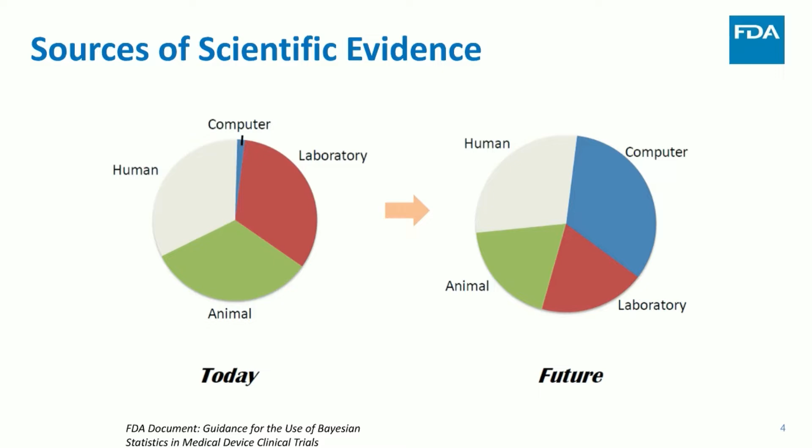To start off, this figure represents what we view as our current sources of evidence for decision making today, which comes from humans, laboratory, and animal models. But as we move into the future, we see a greater role for in silico sources of evidence. This slide is really put together for clinical trials, but this is impacting across the different disciplines across the FDA.

Recognizing that, FDA has formed a modeling and simulation working group a couple of years ago, and the FDA encounters many different kinds of models that impact its decision making. The working group is organized based on the type of modeling.

So there's chemical, there's mechanistic, statistical, physics-based—there's a wide range. The working group's objective is really to raise awareness about modeling and simulation and how it's used to advance public health and foster enhanced communication among the different stakeholders. The working group has about over 200 members in the FDA.

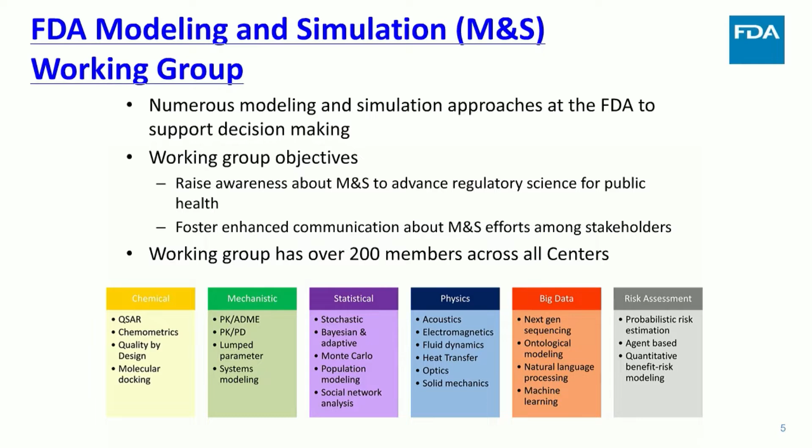But today, what I'm really going to talk about is pharmaceutical quality specifically. In the quality by design framework, models can be used at every stage of development and manufacturing. We have examples of predictive models that have appeared in regulatory submissions and that have been used to control product quality.

Such as dissolution models for release, multivariate statistical models used for estimating residual solvent in a drying and API process, and of course chemometric models associated with PAT methods that can be used for real-time release. We've seen models in all these different buckets, from product and process design, risk assessment, design space identification, in-process controls, real-time release, and so forth.

Just a quick note on terminology and where we are, and I think when we talk about the evolution that's happening currently, these terms are coming into play.

So most of our models in product quality, when we're talking control strategy, are empirical. They're models derived from data and experiments, where we're recognizing relationships based on the experiments you're running.

A lot of the models, maybe in process design or product design, have more mechanistic elements, more first principles, where you're understanding the relationships between variables and that's how you're deriving the models. But we see elements of these coming together.

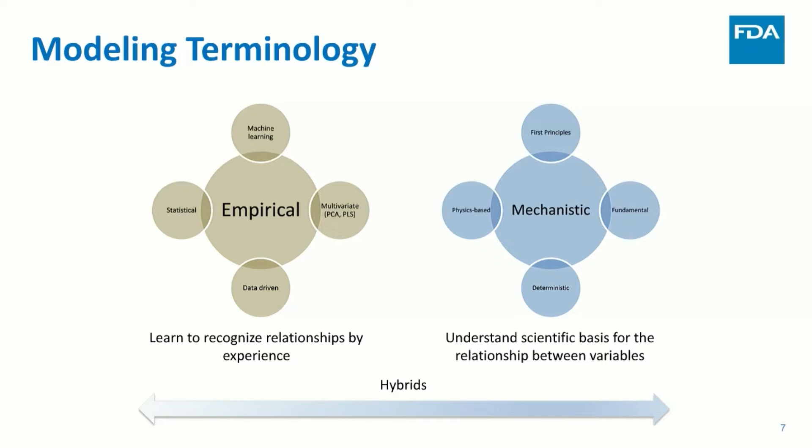There's many benefits and challenges when implementing models, and this is really our internal perspective. As a regulatory agency, we also see models as a potential benefit for process evaluation and quality assessment. So can we use models in how we do our work, not only sponsors. It's very helpful to establish input and output relationships. I think they can be used throughout the product life cycle, such as risk assessment for change prior to implementation.

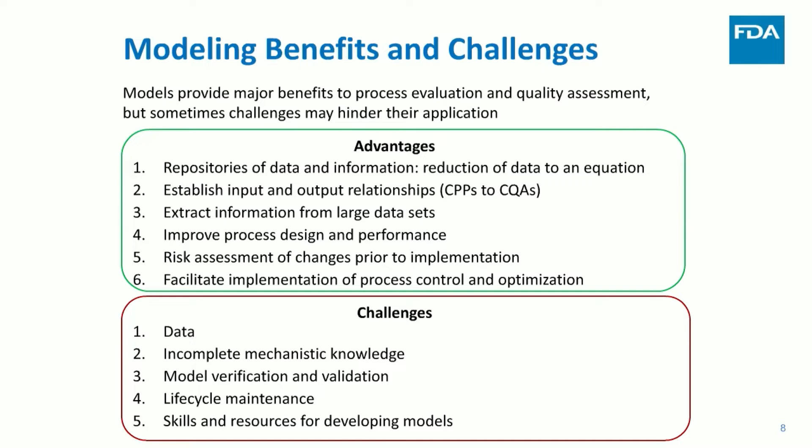But there are a lot of challenges, and one challenge for us is access to data that's representative of the products and processes we're trying to model. I think a common challenge that faces both sponsors and agencies is how to establish the credibility of that model. That's where verification and validation come into play. And if you're talking about models that are going to be used as part of a control strategy, lifecycle maintenance enters the equation.

As I mentioned before, development and assessment of process models by OPQ is not unprecedented, but the frequency and type of models and applications are evolving. We're moving from where we would traditionally just see models derived from design of experiments. And when we had PAT, we had some chemometric models. Now we're seeing a much more wide variety of models being implemented as part of the control strategy. There's still a number of applications, but this is growing and evolving.

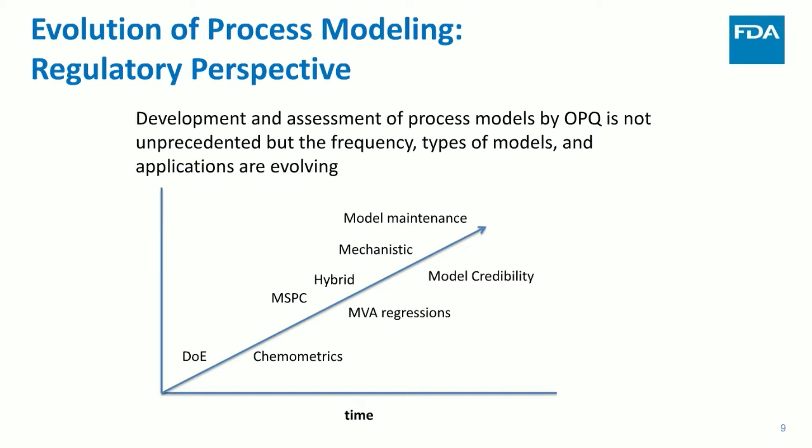We feel this is driven in part by the adoption of advanced manufacturing, such as continuous manufacturing and other advanced manufacturing processes. These processes are generally inherently data-rich. They're connected to plant-wide control systems which are collecting information, because new models are being applied to them. And we see, for all these reasons, it's raising the profile of modeling as part of the toolset to implement these advanced manufacturing systems.

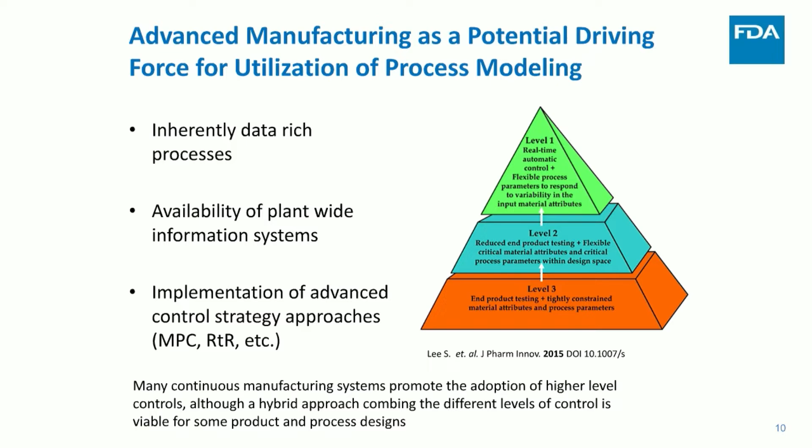If we look at the current regulatory framework, we do have some regulatory documents that talk about models, and one of the primary ones is the ICH Points to Consider document, which categorizes models based on impact to product quality, with high, medium, and low impact. Your high impact models are typically reserved for your sole indicator of product quality, so this would be maybe a real-time release type of model. Your low impact model would be something that falls in the realm of process design, helping you make a decision at that point in the process, far away from actually impacting product release and certifying product quality. It provides a limited amount of information, very general, about how you validate models for these different impact levels, although it does talk a little bit about how you would document them in the regulatory submission.

Now, one type of model we have gained a lot of experience with are models associated with process analytical methods, particularly NIR. In the NIR draft guidance, there's a lot of specific information about how to validate those specific models. We talk a lot about the information we'd like to see on that external validation set, and what information needs to be supplied as part of that, and how it's validated. Because this is part of the analytical method, some of the principles of validating analytical methods are also employed. We also talk about this idea of lifecycle maintenance, because these are models that are typically employed as part of the control strategy when they're submitting.

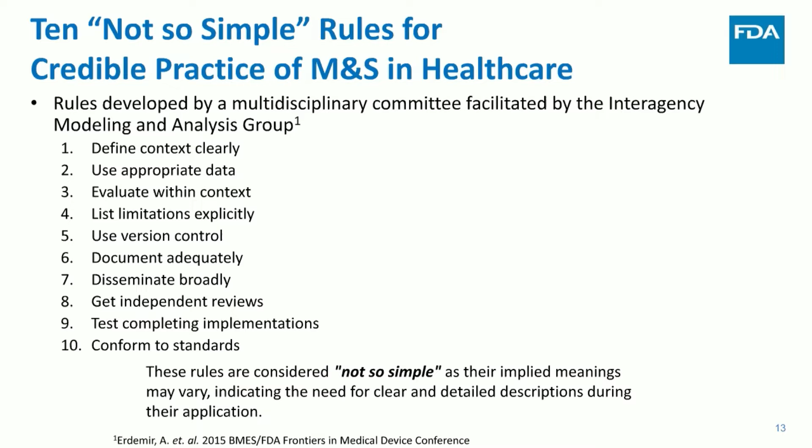And this is an area where we've tried to leverage some of the learnings across the FDA. Our Center for Devices and Radiological Health has been working in this area for a while, and this came up a few years ago. They came up with these 10 not-so-simple rules, and I think as any modeling practitioner, you look at these rules, they seem kind of self-evident that this is what you would try to do. They're called not so simple because the devil's in the details, and when you're actually talking about a specific case and what you need to do at each level, it becomes more tricky about deriving consensus about what needs to be done.

So that helped to form part of the motivation where they said, okay, can we be more specific and provide more guidance? And that got a charter for a standard, the ASME Verification Validation 40 standard, which was published in January this year.

But this is kind of some of the motivating factors here. In a regulated industry, where these models could support decision making, what levels do we need for establishing the credibility of that model?

And I think there's things we can take from this framework that are applicable even in the pharmaceutical context. So one of them is the idea of risk.

And the crux of the framework is really a risk-informed framework. So this means defining the question that you're asking, developing a model to address it, and putting the role of that model in the context of how you're going to use it with all the other evidence you're going to use to make that decision.

So that helps you frame what's the risk of the model making an incorrect decision or leading you to make an incorrect decision. And that's where you get to the next step in that process - once you define a clear context of use, you break it down and then decide the risk.

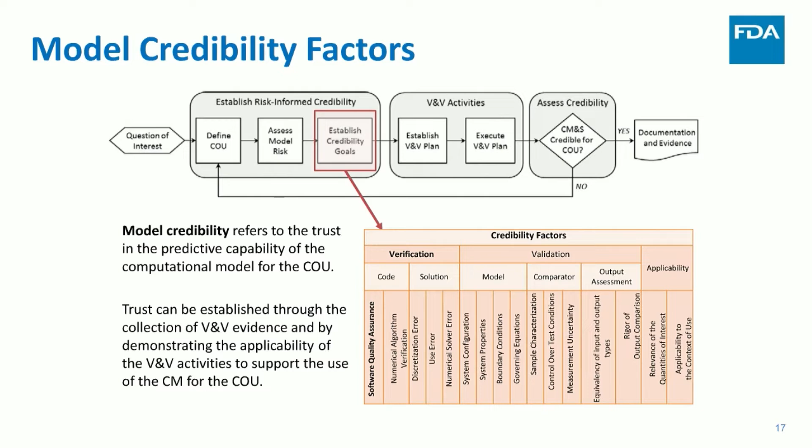And then in each of those credibility factors, there's gradations. Gradations are just a way to describe a progressive level of scrutiny that you're applying to the model.

So the standard provides some guidance on gradations, but they're pretty general. Where they come through a little bit more is in the examples they provide in standards. All these examples are related to medical devices.

I think there's an opportunity moving forward for developing cases in the pharmaceutical context. This is really one of the areas where there could be some value in providing more context. So here's one case, this is at the level of rigor for output comparison.

You can start off with visual comparison, you plot the data together, and it looks like good agreement. That's the lowest level, and then you can be more quantitative, more stringent about what level of agreement you're accepting, and how you're dealing with uncertainty in both the measurement and the modeling, and how rigorously you're treating that. You can go down to different levels about how much work you're putting in, and that would just depend on the model risk.

So when we've looked at the standard, I don't think it's directly applicable to the hybrid cases we're seeing, because the standard was really geared towards physics-based models. It's not directly applicable, but I think there are two things that are really useful: the context of risk-based validation, making sure it's fit for purpose, and then building these plans, breaking out these activities into different categories.

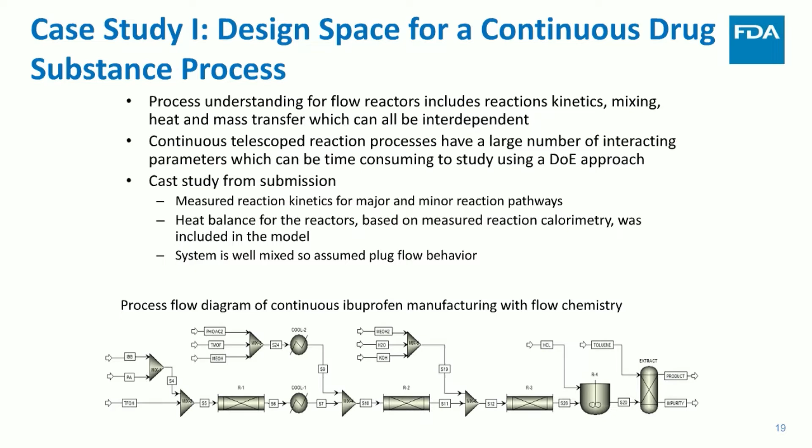What I showed on the previous screen is actually a case for ibuprofen that we've taken from literature and worked on. So this is not strictly the case study, but I think it gives you the idea of what a typical continuous flow process might look like.

And actually some of this data is taken from our ibuprofen case study, not the sponsor's case study, but again similar, showing basically how temperature disturbances can impact impurity formation when running at different temperatures. That's one of the elements they looked at in the design space.

So as part of their validation exercises, they looked at the governing equations. They challenged the kinetic pathway model they put together, tried different formulations there, and looked at the sensitivity analysis of some of the key process parameters, the kinetic rate constants.

In the comparator, they looked at not just one worst case, they looked at 16. For the validated output comparison, they wanted to look at both the model and the experiments achieved. Even the worst case scenario, they were still well below the threshold for these impurities that would be cleared.

And the model DOE consisted of 537 runs, so much more than they ended up experimentally testing in the end, just to verify those worst case scenarios where they still found that they were well below the impurity threshold level.

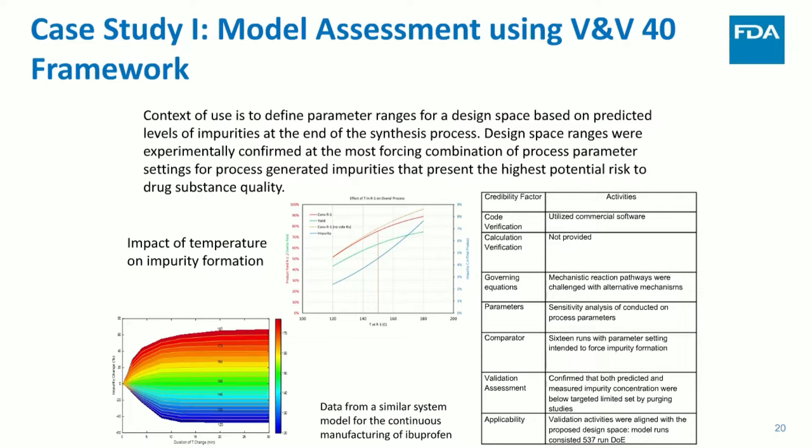So that was a good case of using this template just to structure the activities. This is not how they talked about validation, but when we were looking at it, it helped us structure how we were setting the model and talking about everything they did, putting it in buckets, so we had a complete picture of how the credibility of that model was established.

So the second case is again a continuous manufacturing process, but this time we're going to look at the drug product process. Here is an example of a continuous direct compression process where you have material loss in weight feeders feeding both the API and all the excipients.

You can sometimes have just a single blender, where everything flows into that blender. In this case, we had two blenders: the second blender doing the lubrication blending, and then going to the tablet press.

So one of the key things as part of developing and understanding this process is understanding the process dynamics. Typically we've seen this done by measuring the residence time distribution, the probability distribution that describes the time a mass or fluid element remains in that process, which gives you a macro mixing scale model of the process.

Using that understanding, you can fit it to a series of well-known model classes and use that to predict macro mixing. You can take disturbances or input feed rates and trace those materials, or even take it a step further and predict what the concentration would be, taking in the real-time measurements of the feed rates. What would that blend look like at the exit of blender 1 or the exit of blender 2?

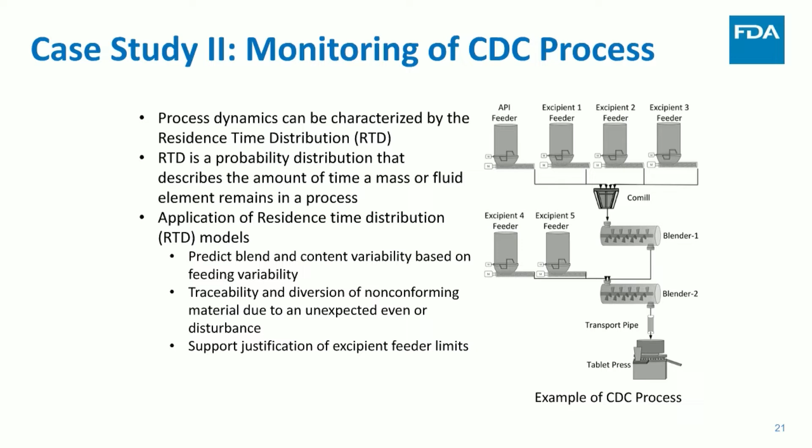And so in this case, the context of use was to actually predict the formulation components in the blend, not just the API but also the excipients, in case there was an excursion that led to an excipient being below a needed threshold.

And the primary control strategy still has an NIR being measured, so the model is not being solely used in real time to measure the concentration. It's used in conjunction with this NIR method. But the NIR is focused on the API, whereas the modeling is focused on all the factors.

Again, in this case, they looked at, from a governing equation perspective, the sensitivity of the model form.

And then they looked at the sensitivity in some of the model parameters. If you're in tank-in-series models, this might be the mean residence time and number of tanks, things like that.

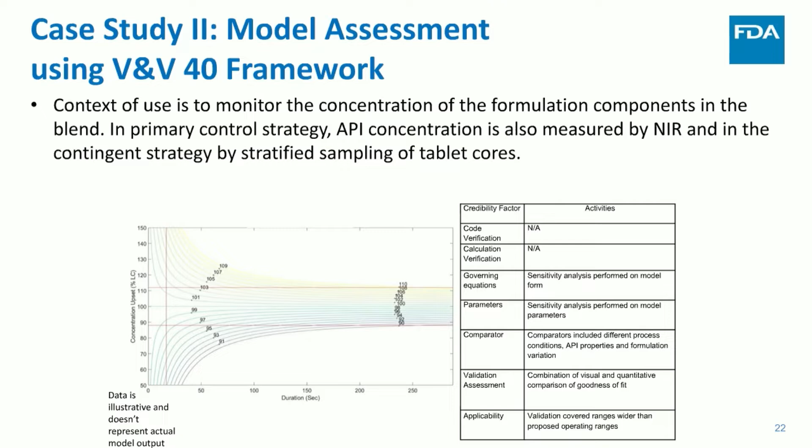And for applicability, they actually tested over a wider range than they were proposing in their design space. So again, this is just a framework in which we put the information needed to give an overall assessment at the level, and it was well commensurate with the risk for this model.

So I just wanted to share some concluding thoughts. Our regulatory experience with process modeling is evolving — we're seeing more diverse experience over the last couple of years than traditionally, where we would typically only see models derived from design of experiments for a process model.

We continue to see chemometric models and associated PAT methods, but now we're seeing a lot of flow sheet models, which I think Sean will talk more about in the next talk, and other kinds of hybrid models, really to inform setting control strategy limits and helping inform that decision making.

Again, advanced manufacturing and emerging technologies are a driving force. I think you see that in some of the case studies I highlighted. This doesn't only apply to continuous manufacturing, but we do see it very commonly associated with continuous manufacturing.

And for verification and validation activities for models, I think this should be fit for purpose, and conversations will continue with sponsors as we propose these models, and as a community, I think we can continue to strive to get more consensus about these.

So the V&V 40 standard, I think, is useful, along with our current regulatory guidance. I think there are some differences in the pharmaceutical context, but it has been helpful for us as a starting point. It needs to be adapted a little bit to cover these hybrid models.

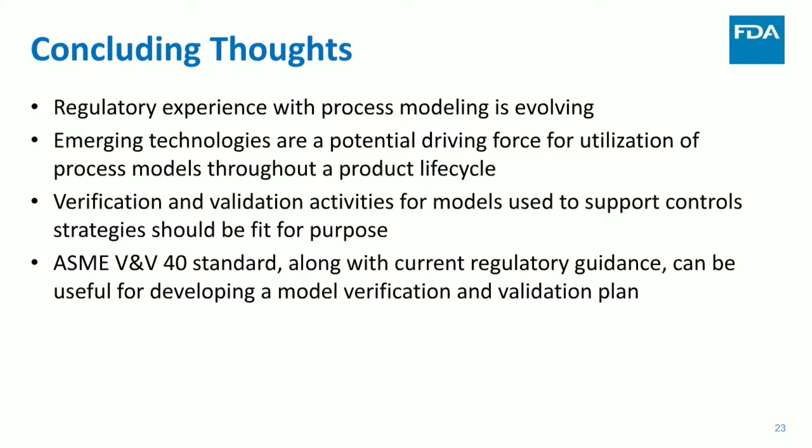And I think the gradations for specific case studies — developing those case studies where we actually get into a level of detail of what those gradations are — will be very useful for the community at large and FDA in turn. So with that, I would like to conclude my talk.

These are some of my colleagues, Nima and Michael, who did some of the modeling work, and then my leadership, and Tina Morrison is certainly a leader at the FDA on the adoption of modeling for decision making. So with that, I'd like to conclude my talk, and thank you for your attention.

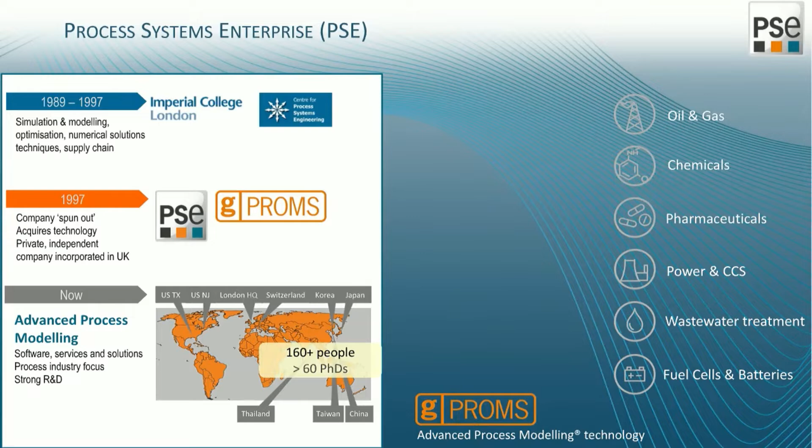Our mission statement is to define, develop, and drive the adoption of next-generation modeling technology, methodologies, and workflows. What you'll see in this talk is there's been a focus on putting more mechanistic understanding, more physics, more chemistry into the models. But actually what we'll focus on more is how to use those models, how to calibrate them, and how to use them to define design spaces and also determine how much confidence you can and should have in the model.

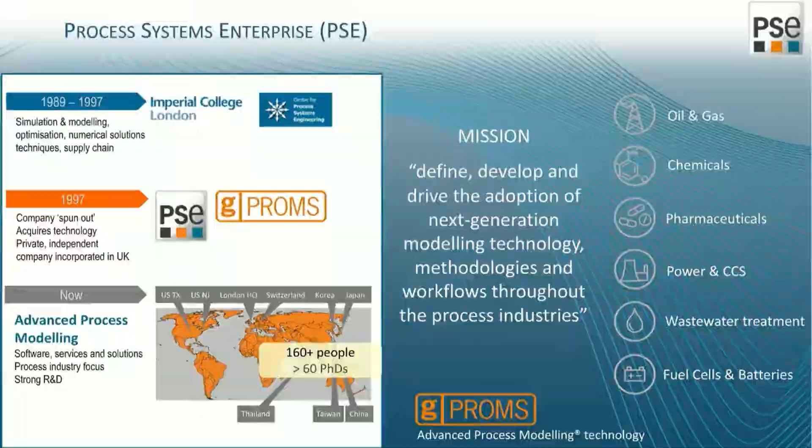In terms of our vision for the life sciences industries, our vision is to enable drug products and the manufacturing processes to be optimally designed and operated with fewer resources, so fewer experiments, less manpower, reduced risk in tech transfer, in operations, and for better end-use performance. And we aim to achieve that vision through the use of mathematical models based on mechanistic understanding, and in some cases also data analytics if mechanistic understanding is missing. So the concept of hybrid models that you also heard in Tom's talk is also something we work with.

In literature, there are quite a few examples now of people using mathematical models effectively to help design robust processes and products, often done by academics or leading scientists and engineers within the pharmaceutical organizations. Making that more widely accessible requires tools that allow you to rapidly configure, calibrate, and deploy those models. So it's not just about developing models. A lot of this is about workflows.

As I mentioned before, we develop models for manufacturing processes, which result in the drug products, and we also develop models for the performance of those products in terms of oral absorption or in vitro dissolution, precipitation, and stability models. Our vision is based on being able to link those models so that we can actually look at the combined effect of not only patient physiology, but also manufacturing decisions and disturbances on the final product performance in vivo, as well as understand how a certain formulation and combination of manufacturing conditions will result in flowability or not, good content uniformity or not.

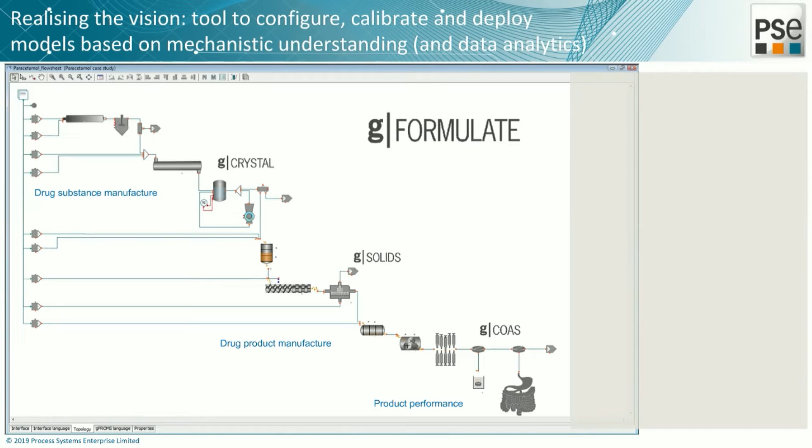In terms of this framework, the mechanistic unit operation models are typically calibrated on a per unit operation basis, or if possible on a per phenomenon mechanism basis. So things like solubility and isotherms are of course calibrated in isolation from the actual unit operation model.

Once you have the calibrated models, you can use them to construct integrated system or flowsheet models. This is a screenshot of a model that runs, and there are one or two applications in industry where people have done this. But to set realistic expectations, what people do today is typically look at individual unit operations, or as you'll see in some of the case studies, link a number of unit operations within drug product manufacture or drug substance manufacture.

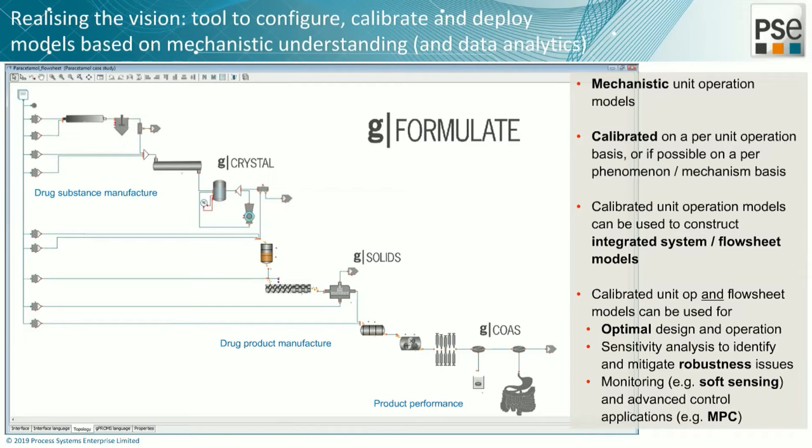So depending on the need of the problem you're trying to address, and the quality of models and data, you may look at larger systems or smaller systems, and you have the flexibility to do so. These calibrated unit operation flowsheet models can be used for optimal design and operation, sensitivity analysis to identify and mitigate robustness issues, which relates to our design space considerations. You can also take these models into operations for things like soft sensing or model predictive control.

So pharmaceutical quality - QBD was also mentioned earlier. I put QBD 1.0 and 2.0 in quotes because I don't think they are widely accepted definitions, but we find it useful to try and explain the difference between QBD that most people know, which is based on factorial DOEs and then using the output of the experimental program to build multivariate data analysis or statistical models, versus QBD 2.0, which is based on mechanistic models.

I'll try and explain the difference between the two briefly. So in what is considered more traditional QBD, the models used are typically statistical models, and the data is used to build the model. The aim of the program is to determine the combined effect of critical process parameters on quality attributes, critical quality attributes, and...

The approach to identify robust formulation, operations, or control strategies is to perform a physical DOE in the lab or on your pilot plant or even commercial scale, with respect to 3 or 4 factors deemed to be the critical formulation and process parameters. Often those critical parameters have been determined through maybe some qualitative analysis, fishbone diagrams, and so on, which is based a lot on heuristics and people's personal understanding of the process.

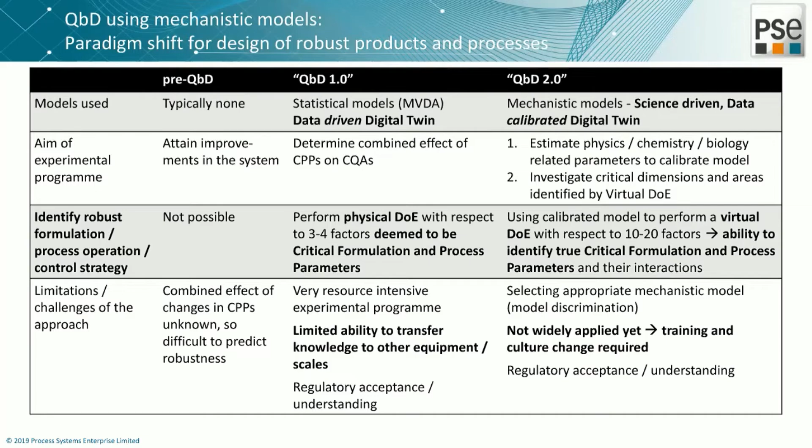So you can see virtual DOE is a key term here, and I'm just going to explain how virtual DOE works on the next slide.

Assuming we have a calibrated model of our manufacturing process, it could be a single crystallization step, it could be a whole CDC, continuous direct compression line, and so on. If we have that model, we're going to have different factors. We have factors that relate to the process parameters or formulation parameters or a combination of the two. These are the things we choose. We need to choose the best combination of these parameters that gives us the right in vivo performance as well as good manufacturability.

And when we talk about robustness, we're looking at the combination of parameters that gives us the right nominal performance, but also has the lowest sensitivity to variability in raw materials, patient-to-patient variability, and any sort of process disturbance.

What we used to do up to a few years ago, before we had automated virtual DOEs, was to run a number of different simulations. Every simulation would be a combination of some of these inputs, the environmental inputs, some of the decision parameters, and we'd look at the outputs, Cmax or D50, and so on. And of course, in our minds, try to create a mental map of what the combined effect is of all these changes.

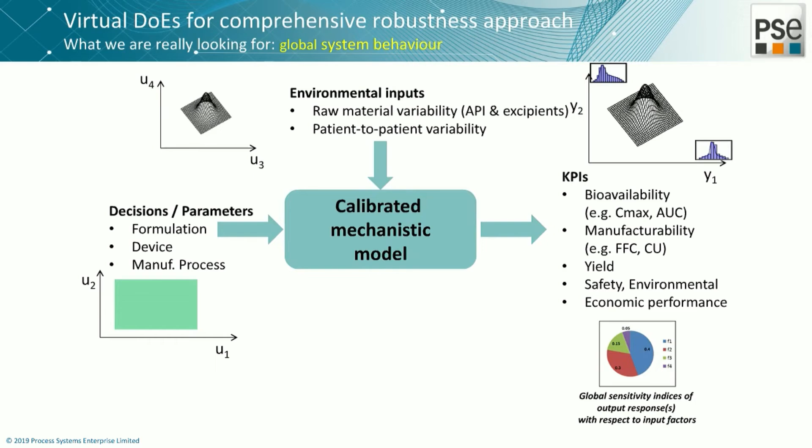Obviously high performance computing is a big enabler, although many of the examples you'll see were run on laptops or desktops with 8 cores. But as people want to look at larger systems with more factors, high performance computing is a key enabler and something that is supported.

The other important thing to mention here is the importance of big data analytics. Although big data analytics may not be the most appropriate tool to understand what happens within the unit operation, we do believe it's a very powerful approach for understanding what some of those inputs should be, in particular things like raw material variability or patient-to-patient variability. So collecting data to put in appropriate widths of distributions is key. If we make this too narrow, we can fool ourselves into thinking it's very robust. If we go with a very broad distribution of raw material properties, we may think the process isn't robust at all, and we're trying to design it for situations that may never appear.

Okay, let me give you a few examples, and I'll go through this fairly quickly. There are 4 case studies that use this virtual DOE framework. The first one is an application that was presented last year. It's the whole presentation, and I think most of the following presentations are available through the PSE website, having been cleared for public distribution.

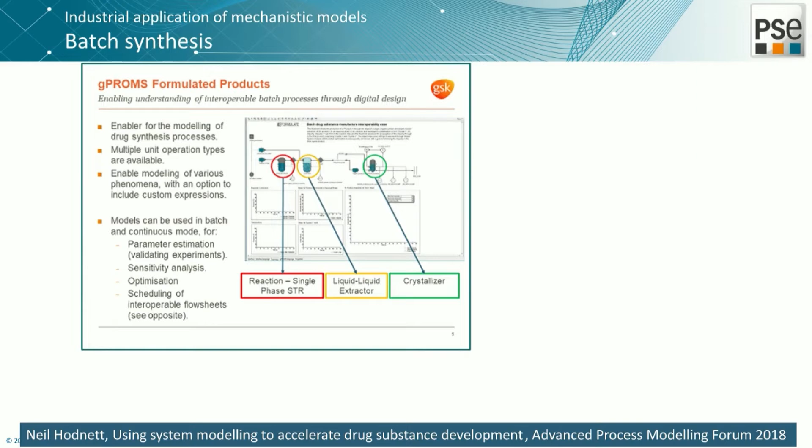The first thing that was done was to calibrate the model - that's the first thing you should always do, of course. Here are some examples of the kind of experiments and measurements that were done. You can see it mentions reaction kinetic scheme 4 - chemists had formulated different mechanisms, and the model was used to identify which one best represents the various experiments.

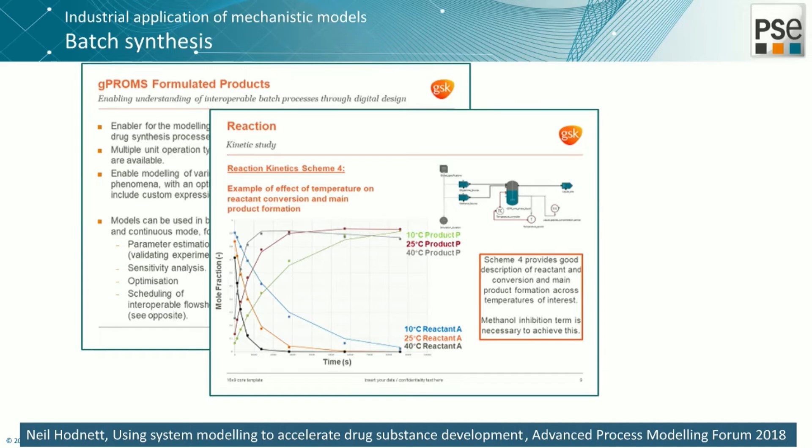With the calibrated model, they then did these virtual DOEs - here you can see results of the sensitivity analysis. This showed that, in terms of pharmaceutical quality and purity of the product, limiting the reaction time was favorable from a purity perspective.

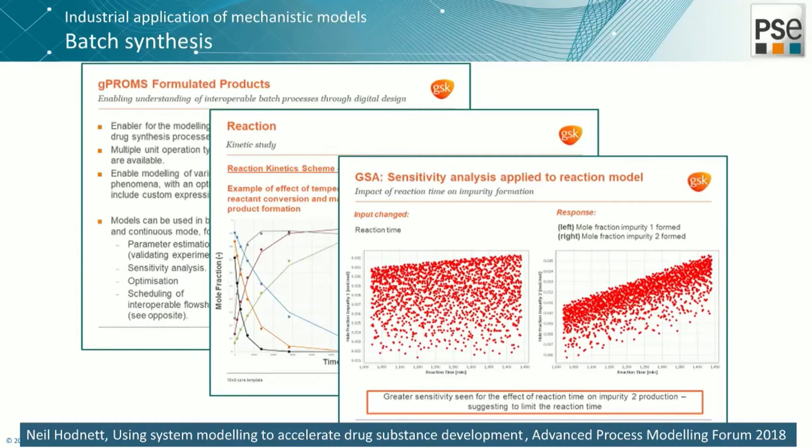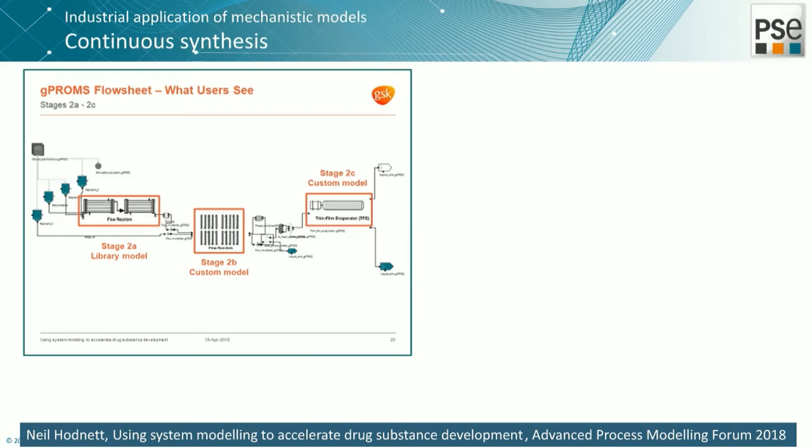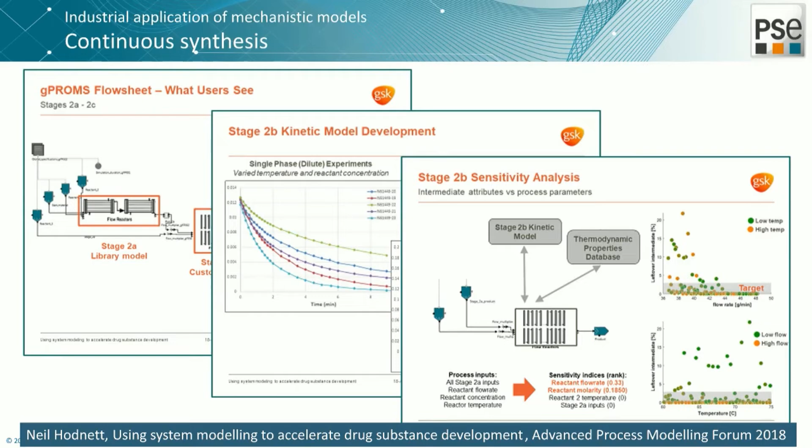The next case study is also drug substance manufacture, but continuous, from the same presentation. This is also a flow sheet, but now there is continuous, or in certain cases periodic, flow between the different units. Again, there was calibration - here we're looking at stage 2B of this process, the middle part. Once the model had been calibrated, it was used to investigate different temperatures, low and high, and low and high flow rate. They were able to look at the variability in predictions, and here, unlike the previous example, they also did a sensitivity analysis and found which factors were the top 2 - flow rate and something related to composition.

So this combined model, actually the calibration—again, if you get the whole case study from the PSE website, you'll see that the calibration was done individually on the ribbon formation, the milling, the lubrication, and the compaction. That gives you a better estimate with less correlation, and it also requires less material than trying to fit it to experiments on the integrated system.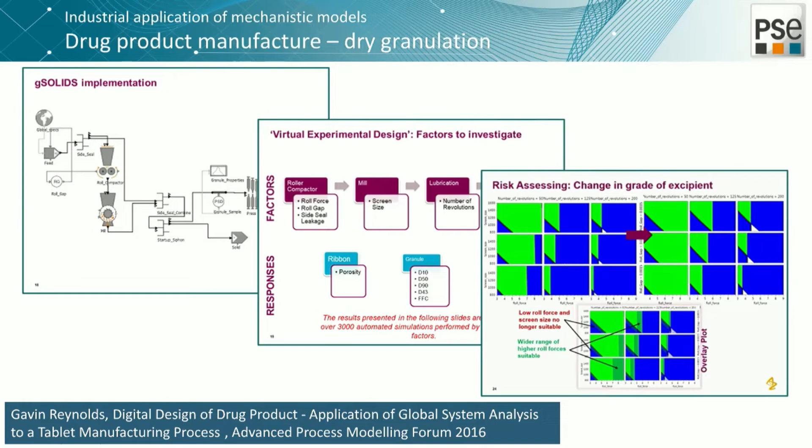So this allows you, when you convey this process to commercial manufacture, to give people much more confidence in their ability to deal with different grades of raw materials.

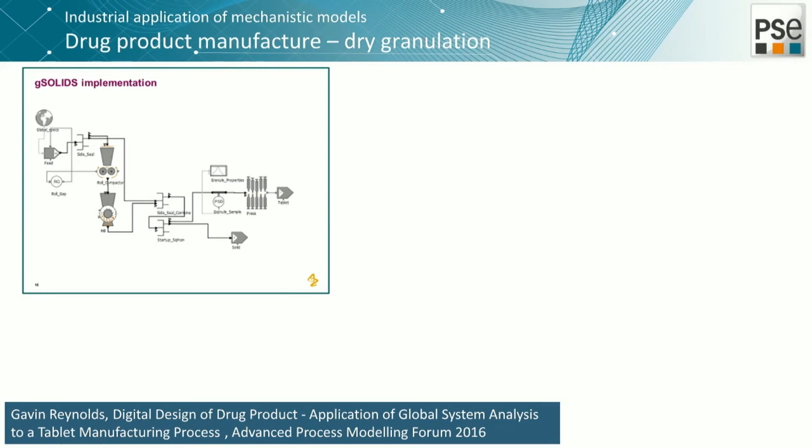The final example is one that was presented quite a few years ago at AIChE, and some of you may have seen updates to this. But this is an example of using the mechanistic models to... not sure why that happened.

Looking at mechanistic models of blenders, feed frame, surge hopper, and taking measured time series of feeders to be able to predict what the concentration of API would be now and for the next few minutes.

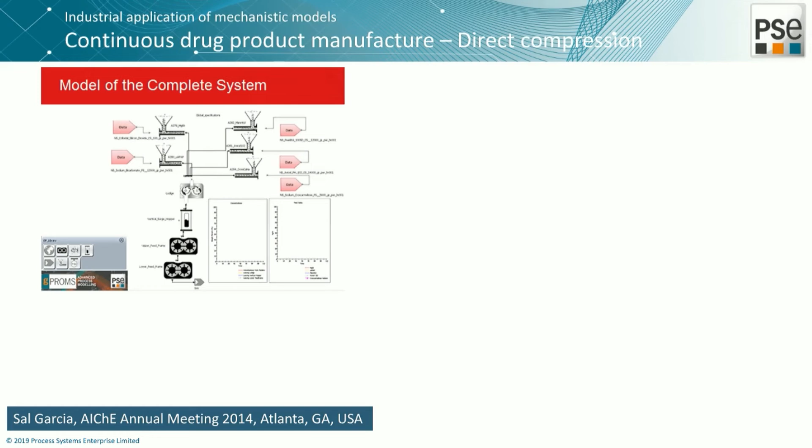So you can see some examples of using the model to see whether the system can reject disturbances from feeders for a given compound or formulation. I think there's links to what Tom was saying earlier—that if you have a certain 10% fluctuation at the end, that doesn't mean you can only have 10% fluctuation at the beginning with your feeders, because these blenders and the feed frame provide some dampening of those high frequency disturbances from the feeders.

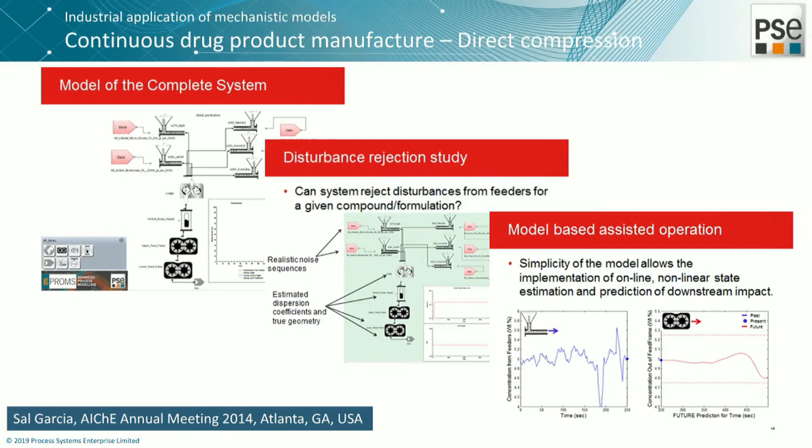And it was also used to demonstrate that you could use this model to predict not only the current concentration of API going into the die, but also the prediction of what was going to happen in the future. This gives you, together with a physical NIR probe, the ability to look not only at what's happening now, but what is likely to happen in the future, which allows you to develop more robust control strategies that take into account expected future behavior.

Okay, very quickly, something on the importance of model and data quality. So I've taken this diagram from Tom's presentation—this verification, validation, 40 charter. Indeed, our approach is also very much based on: you need to define your context of use first.

If you're going to use the model mainly for interpolation and you've generated quite a bit of data, your parameters probably don't need to be as accurate or have small confidence intervals as when you're going to do extrapolations. So it's good to also be clear about the goal of modeling.

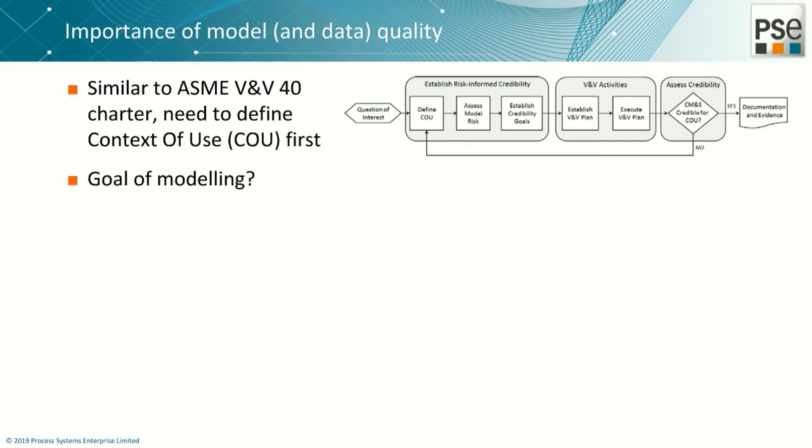So one approach is to use the modeling mainly to determine the critical process parameters that you're going to use in a physical DOE. So physical DOE is essentially QbD 1.0. And you could say, well, I'm going to use the model to provide more objective and better reasoning to determine which of my 5 or 10 factors I'm going to use for a 2 or 3 factor DOE. So as long as you can prove that approach is going to be a lot more robust than something that is quite subjective, based on people's own experience and qualitative reasoning, that's one thing.

If, on the other hand, you want to use the model to directly determine a design space, then of course we need to ensure that the effects of the uncertainty in the model are smaller than the effects we're really interested in—which is the effect of process variability, raw material variability, physiological variability, as well as the different values that our formulation and process parameters can have.

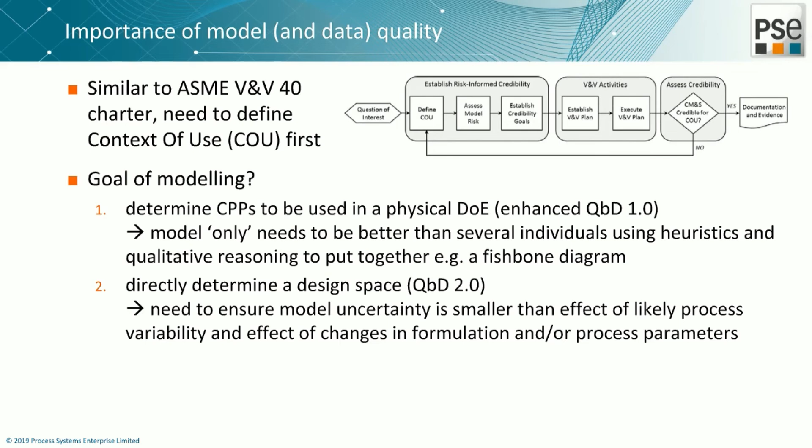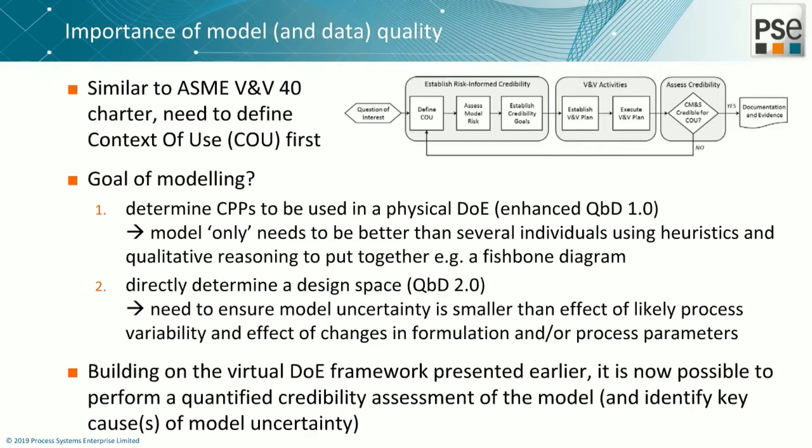This uncertainty doesn't only result from the fact that the model may not be perfect. We may have made some assumptions, or we just don't actually know the exact equations to be used. Even if the model is perfect, if it's a very simple system, the fact that measurement and sampling introduces variance and bias will result in uncertainty in parameters. So actually this framework is not just about determining whether the model is good enough, it also says something about the quality of the data, something we may not always understand if we use a purely data-driven approach.

So that is a capability that is also now available. It hasn't been used in any case studies yet. We're obviously very keen to work with some leaders in the area to see how we can do it. But if the result of this virtual DOE, including the parameters and the uncertainty in these model parameters, shows that the largest sensitivity is to one or two of the parameters, we can then use that information to design additional experiments to reduce the uncertainty in those parameters.

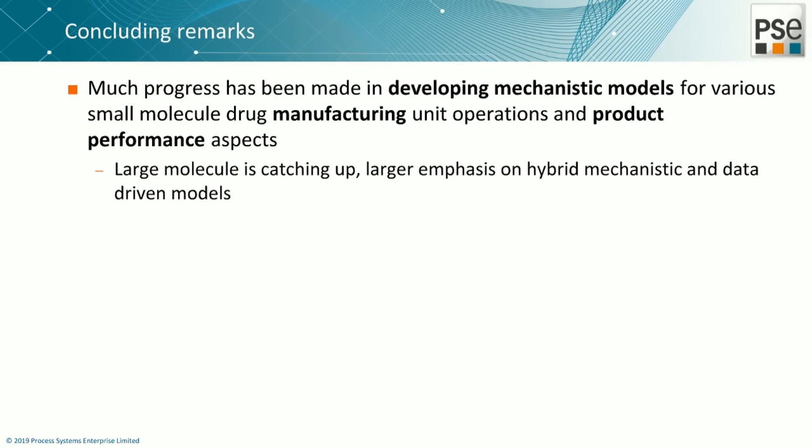Okay, I need to wrap up. So, concluding remarks: over the last decade, a lot of progress has been made in developing mechanistic models for the various drug manufacturing unit operations and also product performance models. In particular in the small molecule area—I think the large molecule area is catching up. Certain areas in large molecule, good mechanistic models can be developed, but in many areas there's a need to go for more hybrid approaches, where we try to use the data-driven aspect only for the parts we don't know, so that we need not too much data and more transferability.

There are quite a lot of pharmaceutical companies using these models now, mainly in the product process R&D and tech transfer areas. And I think the key thing now, and this links to the first part of the talk, is that we really need good methodologies to make sure we account for the quality of the model as well as the quality of the data used to calibrate the model, in order to be able to use these models with known confidence for setting specifications and control strategies.

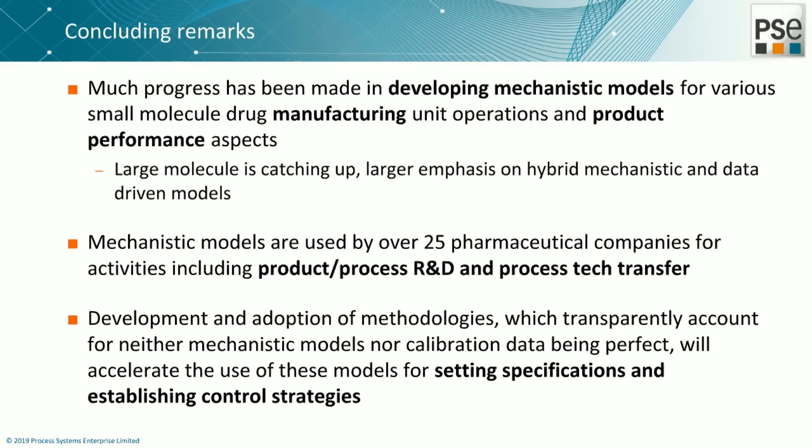As a modeler, one of the things we typically miss from data is that most data sets don't have much information on the variance, the accuracy of that data. If you don't know the accuracy of the data, you don't really know how accurate the model is. Even if the model is perfect, if the data is not very accurate, the parameters are going to be less accurate. So we really do need to have that information.

And with this enhancement to the virtual DOE, I think we can go from a qualitative credibility assessment to a quantitative credibility assessment—again, trying to take out as much subjective elements as possible to ultimately ensure better pharmaceutical quality.

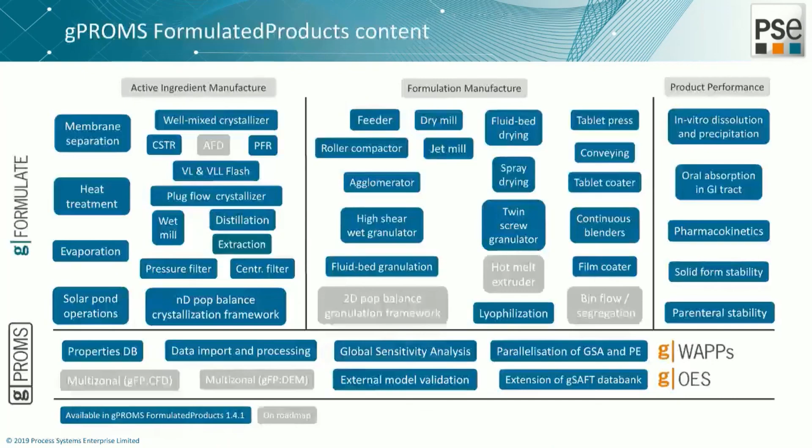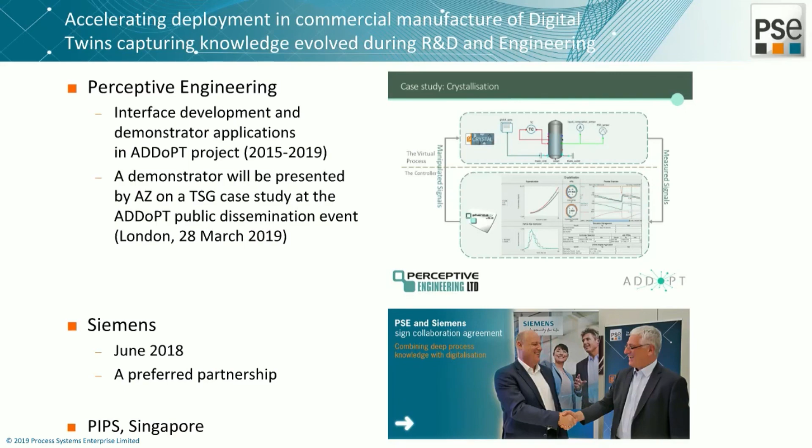Okay, yes. So as I mentioned, most of the work so far, at least from the PSE perspective, has been small molecule. If I just go through, I do have a few slides, or not a few, I only have one actually. So we have started doing some work in the area, about 2 years ago. Just one second, here we go.

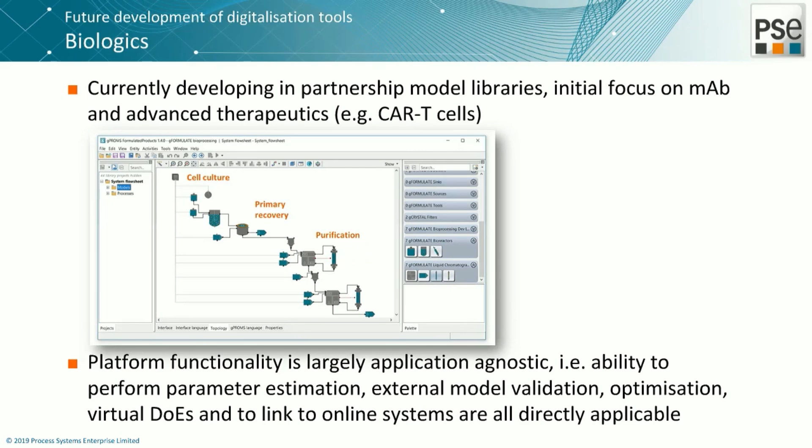I think the good news from our perspective is that a lot of the platform functionality, so the virtual DOE capability that featured heavily in the presentation, how we do parameter estimation, internal and external model validation, and model discrimination, these are all sort of agnostic to whether it's small or large molecule. So our focus over the next few years will be to extend the number of models that we have for large molecule, and ultimately it's going to be more about understanding what are the best workflows in large molecule to make use of models, combining mechanistic understanding and data-driven approaches.

Thank you for that answer. Our next question is: how can pharmaceutical manufacturers interested in using process models as part of their control strategy engage with the FDA? And that'll be for you, Thomas O'Connor.

The FDA and CDER particularly has what we call an emerging technology team. That team provides an avenue for sponsors looking to apply novel technology and approaches. We had several sponsors come to us to talk about their modeling approaches, especially when it gets into the realm of how they're going to control product quality. We discuss a lot about validation and better understanding their intent, and it helps us learn from them and provide early feedback that they found very helpful. The emerging technology team has a process guidance that tells you how to send a request to the team and what information we're looking for to get a meeting with the FDA. So that would be my recommendation, to engage the ETT team.

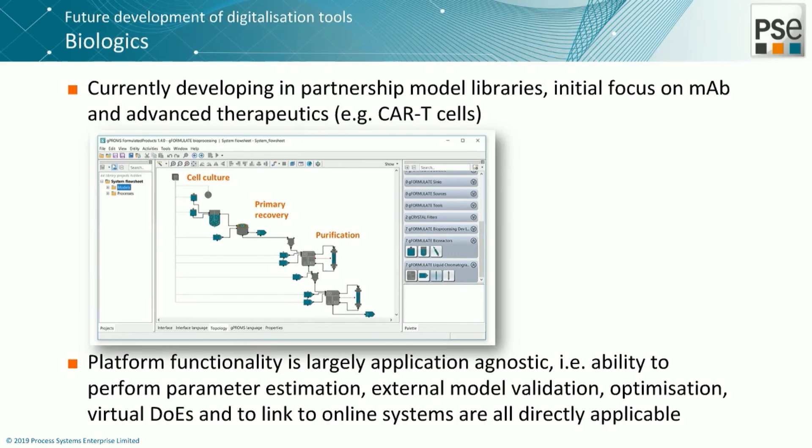We haven't done it yet, but I think the next release of our software will have the ability to use the virtual DOE capability to create a very large data set from which you can build surrogate models, things like the ALAMO approach from Carnegie Mellon. This is a very good question, it's exactly what we want to achieve. I think there are people, especially in academia, who've used some of our tools, run these virtual DOEs, and done their own post-processing with the data sets to come up with surrogate models. We think that's really important, especially for online applications and applications where robustness is key. So if whoever asked the question is interested in testing this, I'd be happy to work on some case studies together. We should have this surrogate modeling capability in our platform, released later in the year, but definitely still this year.